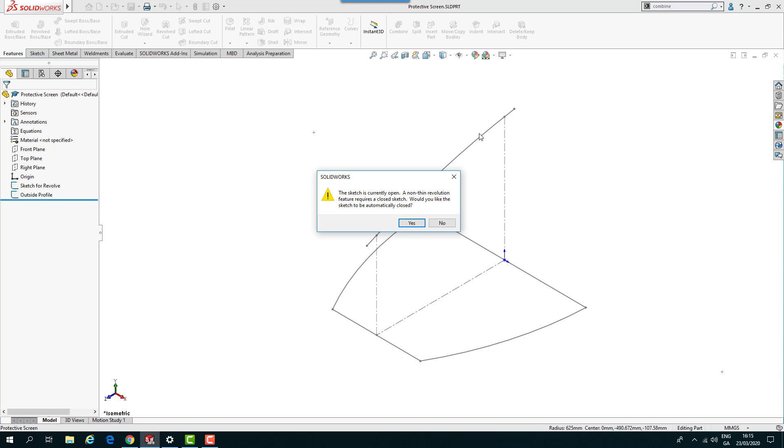If I select the sketch, it's a single line, not a closed sketch, so it's asking if you want to close the sketch automatically or create a non-thin revolution. We want to leave it so it doesn't close, so I'll select no on that.

My axis of revolution is going to be this little construction line down here on the bottom, and 90 degrees is all we need to make this revolve. You can see it's gone to one side, so we just need to make it mid-plane.

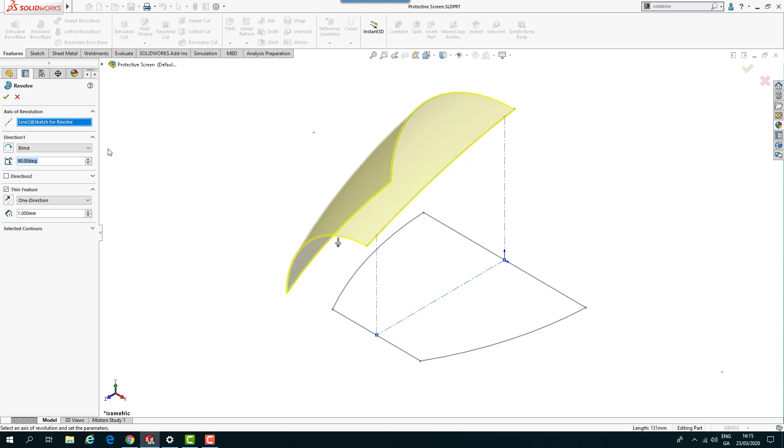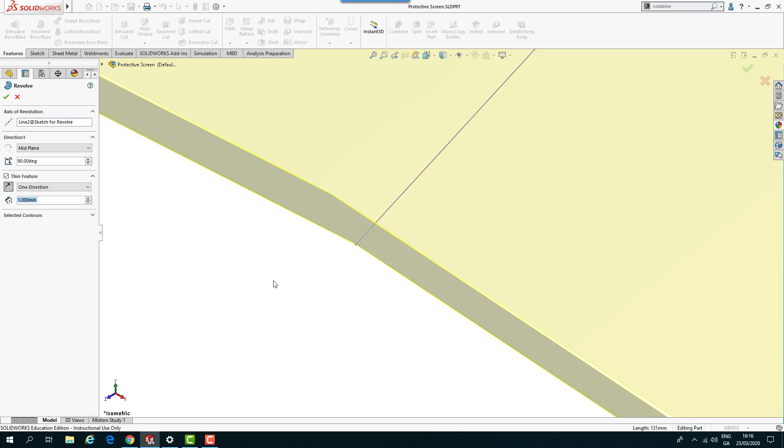The final thing is the direction, because it's a thin feature. If I zoom into it, you can see it's coming down, so I need to get it to move up. Initially it was coming down, we needed to go to the outside of the sketch, so just click on that and I'll click OK, then go back to isometric, and that creates my revolve feature.

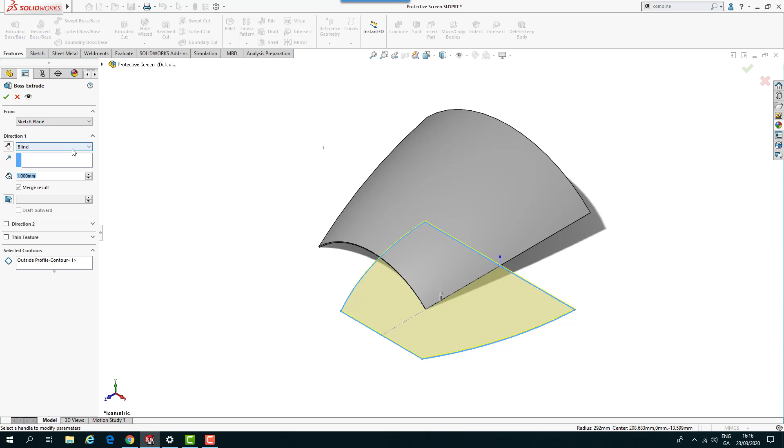Next we're going to do an extrude boss base, select my outline at the bottom, and we're going to go through all in this one. Going through all, and if I zoom around so you can see it, it goes to the very top edge of that previous solid body.

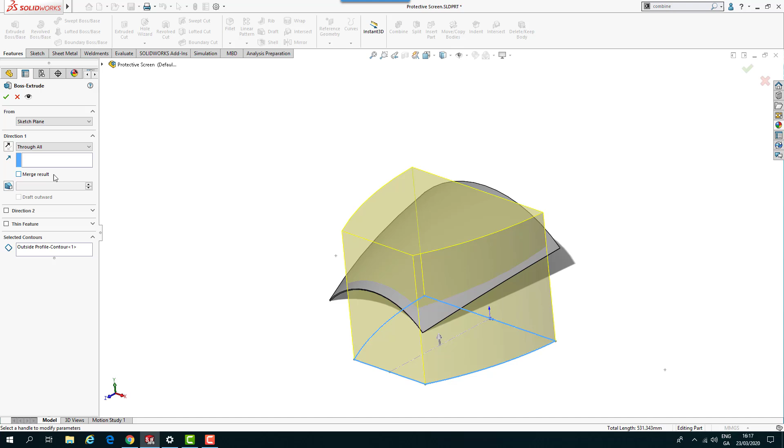I'm going to uncheck the merge results in this one because I don't want the two of them to merge, so I'll just uncheck that, which gives me two separate solid bodies. Uncheck that and click OK.

Then nice and handy, we'll do a little shell. So shell, and it's a 3mm wall, and the face to remove is going to be just this top face. I'll click OK on that.

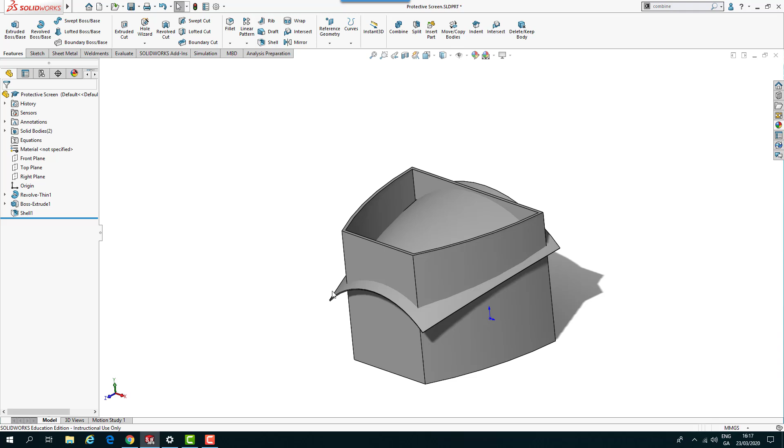So just to check that went okay, if you hold down your tab key and hover over one of the bodies, the top body there, that revolve thin one, you can hide show that by doing that, just holding down the tab key. And to get it back, we can just check that we got that okay.

To get it back, you can hold shift down first and then hit the tab key and then move back over the part, you see it kind of comes on again, which is a handy feature. So tab key, you can get rid of something, and shift tab, and you can bring them back. You can hide show them very quickly with that handy little tip.

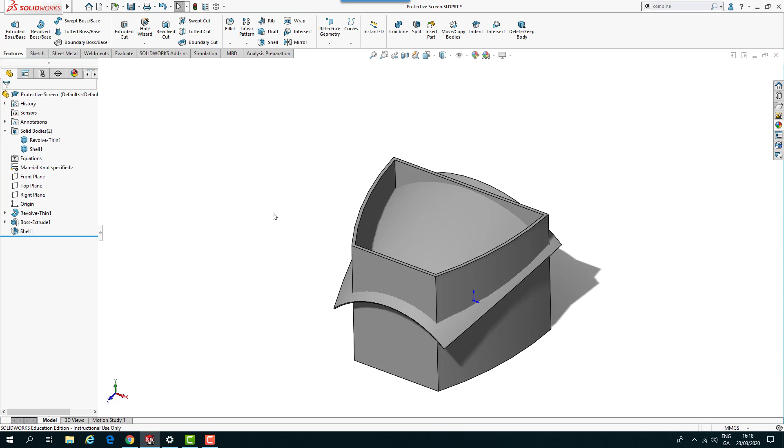So I'm going to hide show again, I'll go away with that because I want to concentrate on this. Now it doesn't stop it from being recognized, the part's still there, so if we were merging stuff, that'll still happen. It's just hiding it from your view, that's all. So just be aware of that.

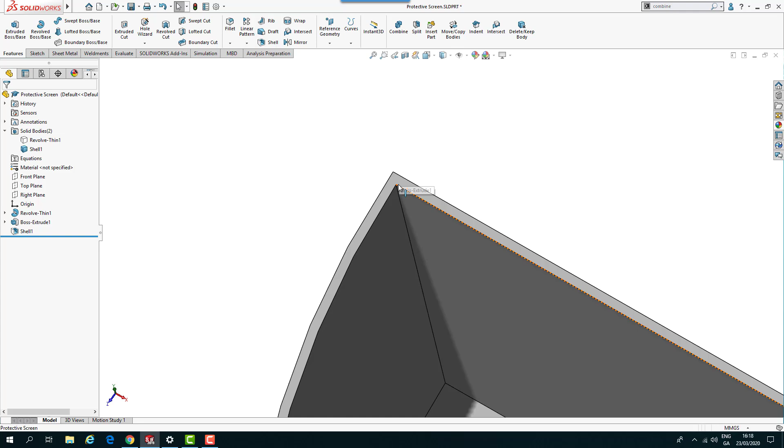So we're going to create a rib feature then on this, so I select this face here to create my sketch, and then just do a single line. Make sure you snap to get a coincident on this as well.

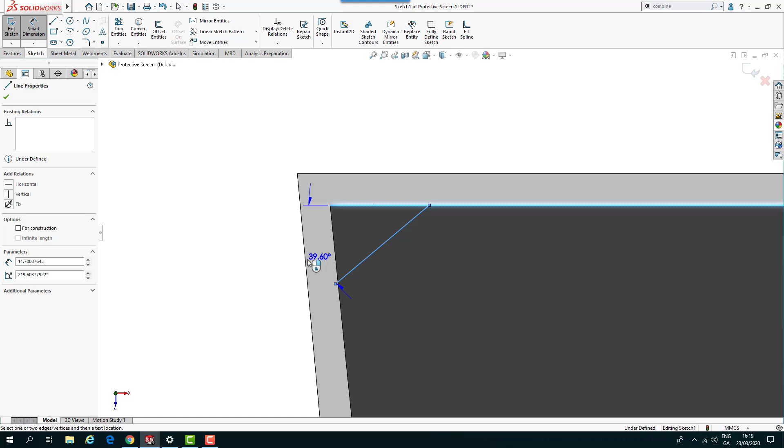Because the back edge is a straight edge, we'll do the dimension, then we just put a straight dimension on that first, so that should be 45 degrees. And then we pop in our dimension, so that should be 5mm. So that's that sketch complete. Then we're going to do the rib feature from that.

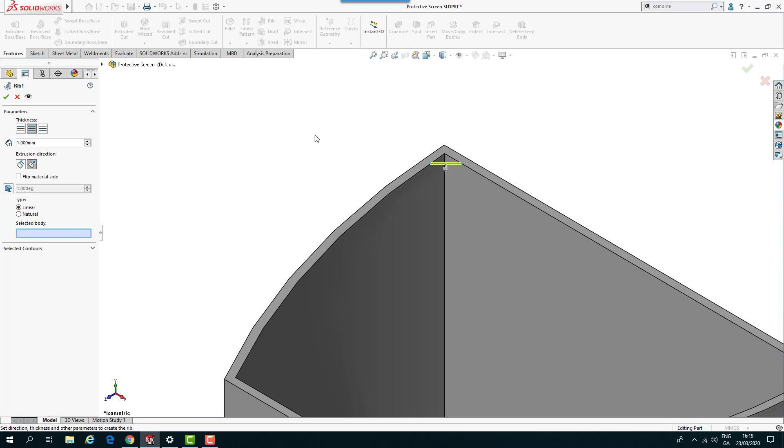Select rib, so you can see it's pointing away from us there on the screen. I'm just going to change the direction of the extrusion. If you need to, you can flip the material side on that, just flip it like so. We need that coming down, so it's going to create the rib down into the main body.

Talking of the body, we need to select the body as well, so we don't want the other body interfering with it. So we're just selecting this body, and I'm going to click OK on that, and that gives me that little rib.

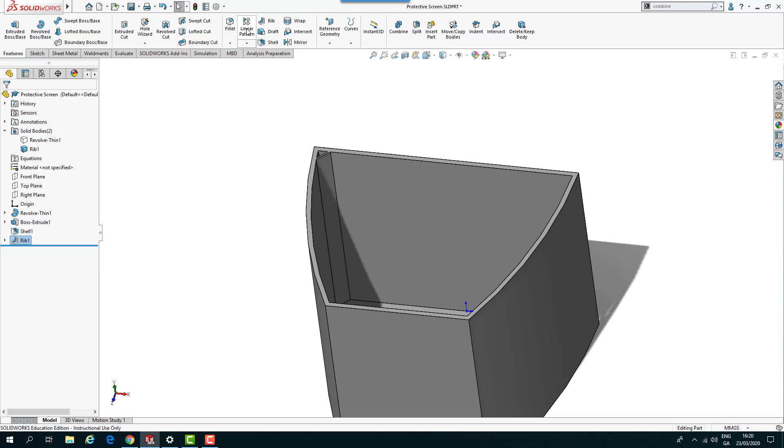Now I'm going to create the pattern, so I need a linear pattern, and we're going to use this 5mm dimension as our direction, running parallel with those arrows coming through there, coming from there to over in that direction. So select that 5mm dimension as the direction, and for spacing and instances we could just do that.

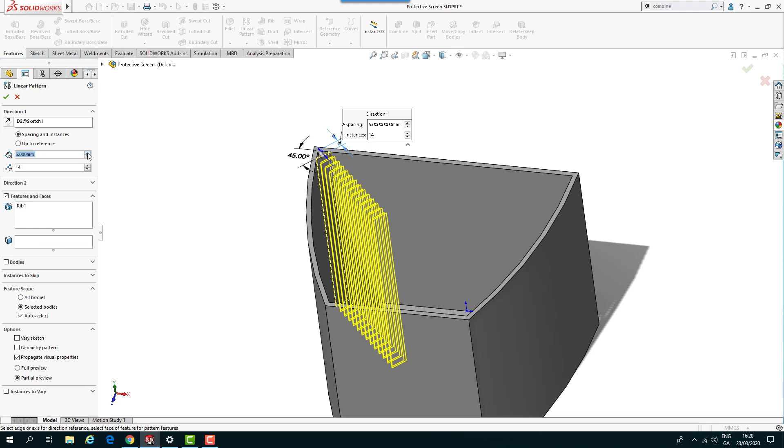But we're going to go up to a reference point. We don't want it to go any further than that corner point there. So I'm going to select up to reference, and zoom in here just to make sure I pick that. Make sure you pick the dot on the corner. So that's my reference point on that.

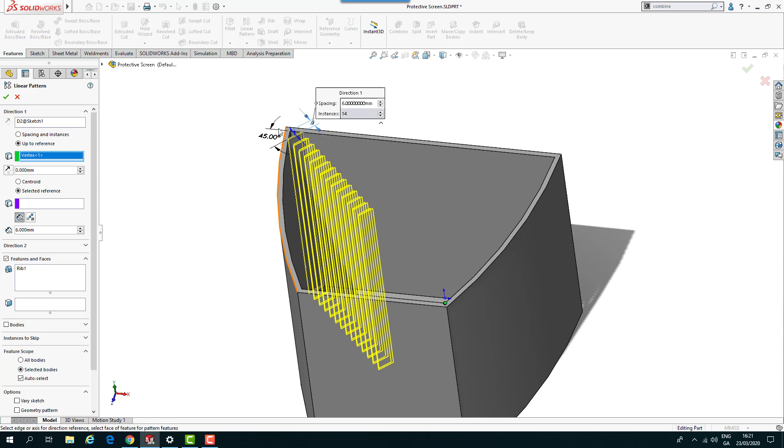Now it's looking for a selected reference, an edge to reference where it stops the pattern. So just to explain that a little further, if I go back to the actual rib and take that front edge, the distance then is going to be 12.75.

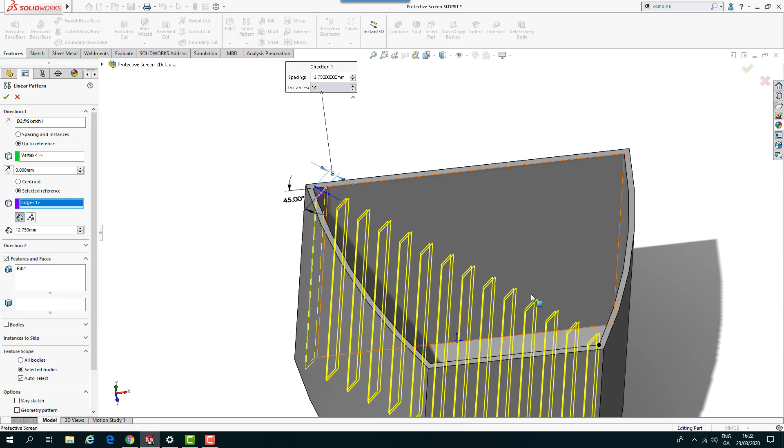And we get that pattern done. What we've got there is a pattern, and they're 12.75 spaced. But you see the last one, because it doesn't have room to stick in another one there, so it stops at that. It can't fit another one in, so it stops the pattern there.

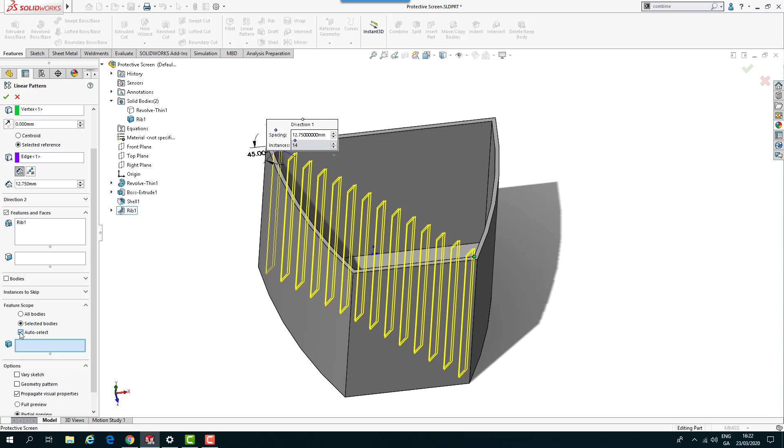Now we've got our feature, the rib. Down here in feature scope, auto select, if we just leave auto select selected, it would fail, because even though we can't see the other solid body, that doesn't mean it doesn't exist, it's still there. So we've got to allow for that. In feature scope we're going to uncheck auto select, and for bodies we're going to just select that body. Make sure geometry pattern, everything's okay, I think.

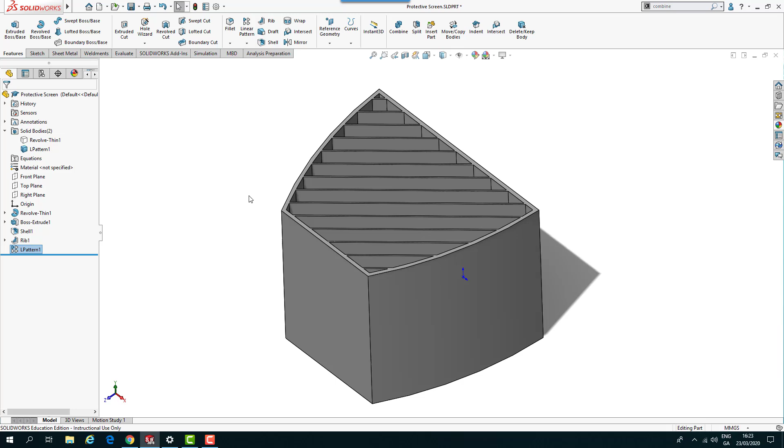Click OK, and we've got our ribs created and patterned. So next we're going to mirror this pattern again, because we want the crisscross going on that rib. So we're going to mirror, and it works out really easy for us because this is a symmetrical part. We can just mirror the whole thing, and it'll create the ribs both ways.

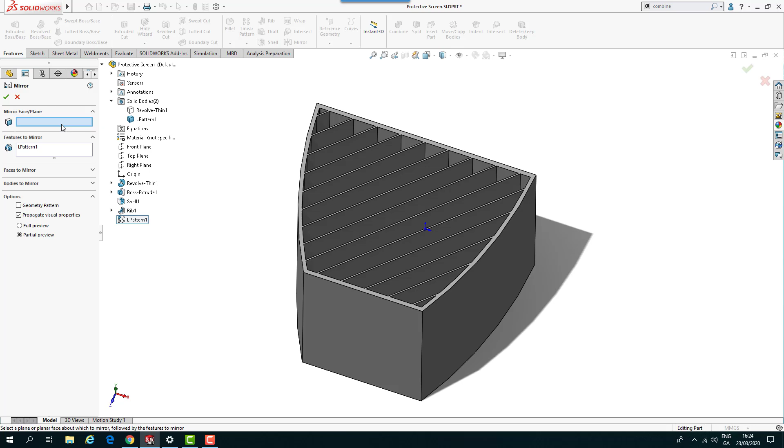It won't affect the mass properties at all because it's mirroring on itself. The outside doesn't really affect us at all, and it makes it nice and easy for us to mirror this. So if I mirror, and select the face or plane, that right plane, we're not going to mirror a feature, we're actually going to mirror a body. So I'll clear the selection on that, get the body, and the body we're going to mirror is this LPattern1.

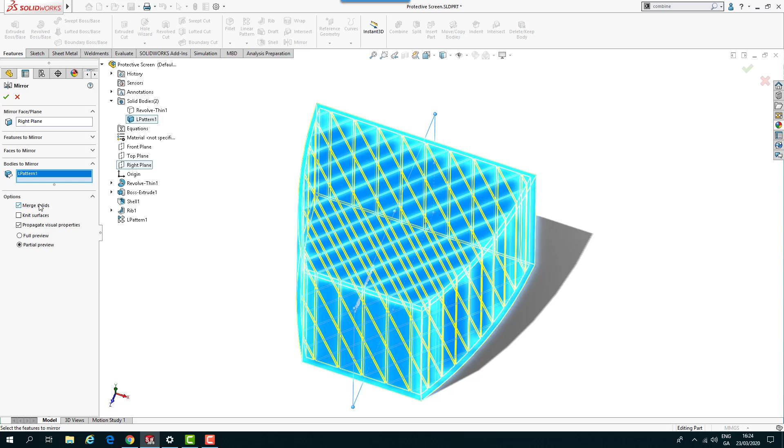And we're going to merge solids on that one. So that creates that, and we've still got two solid bodies, so we make that other part visible now.

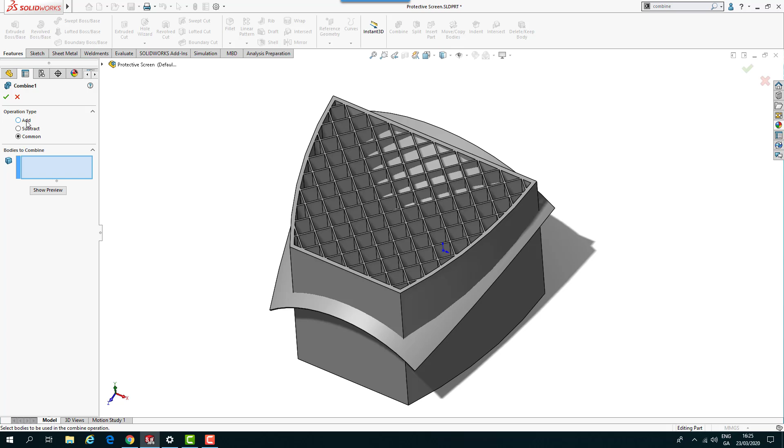Okay, so the last little part in this is using the combine command. Select the combine command, and we're going to create this little mesh, we need to get the common areas. The common areas on this is going to be this part and this, so what's common to both of those. Do a little show preview on that, and you see you get your mesh. Click OK, and we got that nice little mesh going on, and that's that part complete.

So that's this exercise complete.